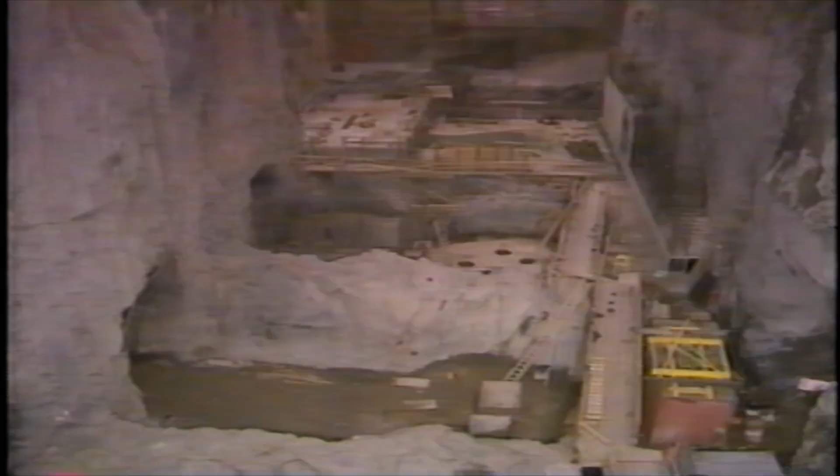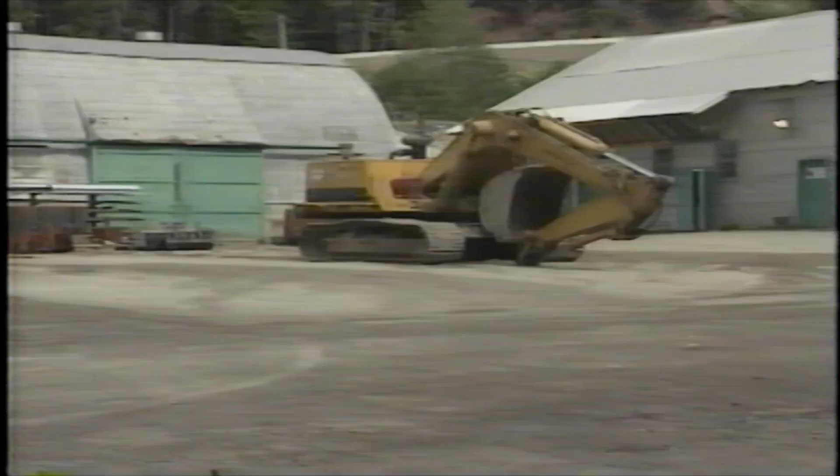On June 13th, in response to a court decision putting the future of the Kemano Completion Project in question, Alcan started to slow down operations. Eventually, that slowdown became a full-fledged suspension of almost all construction activity on this $1 billion project. While Alcan makes every effort to get this project back on track, hundreds of workers, engineers, and managers have left Kemano. Most of the heavy equipment, though, has been mothballed on site, ready for an orderly resumption of construction activities when the project resumes.

To give you a better understanding of the situation we're facing, here's Alcan's Vice President for British Columbia, Bill Rich. As this will be the last news video until work resumes on the now suspended Kemano Completion Project, I want to take this opportunity to make a few comments about the project and what lies ahead as we make every effort to get it back on track.

First, I'd like to review briefly the events of this spring. In May, a decision by Mr. Justice Walsh in the Federal Court of Canada ruled that the Kemano Completion Project must undergo a federal environmental review. In his judgment, he quashed the 1987 execution of the Kemano Settlement Agreement, which had secured for Alcan the conditions under which we could carry out construction and operation of the project. This agreement, which had been signed by both the federal and provincial governments, spelled out everything Alcan was required to do during both the construction and the operation of this final phase of our Kemano project, both from the perspective of environmental protection in general and the fisheries protection program in particular.

Both governments had initially approved our project 40 years ago, and as many of you know who worked on it, most of the major physical elements of the power generation system have been in place for decades. The 1987 agreement was really about the modern environmental improvements which Alcan agreed to make to an old design. It was not approval for a new project. And to confirm that view, the federal cabinet passed an order in council directing that the federal review process for new federal projects did not apply to Kemano Completion. Justice Walsh quashed that cabinet order in council as well, an unprecedented action by a court.

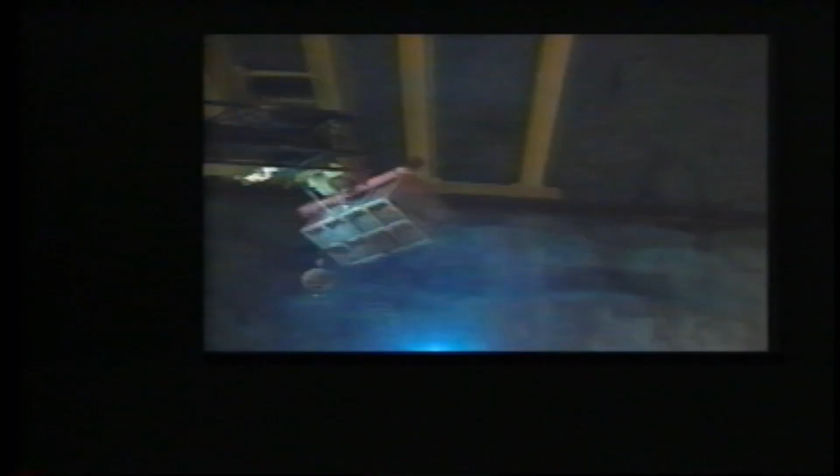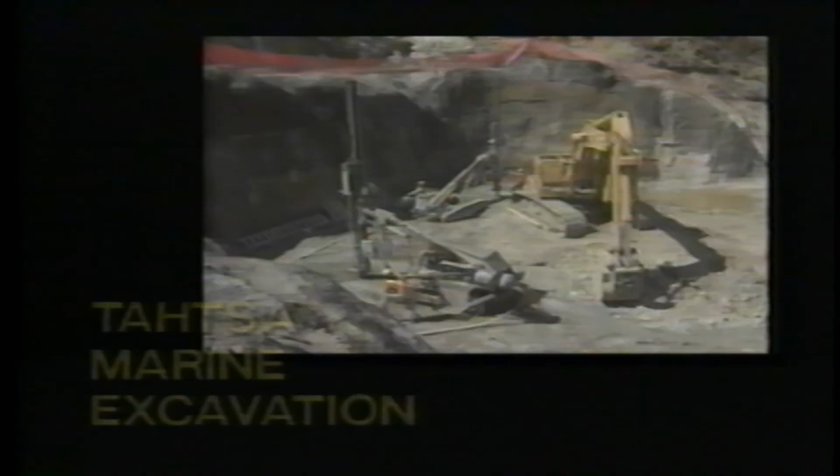In this edition of the KCP News video, before the shutdown, the Kemano Completion Project was rolling along in high gear as the underground work moved from the excavation stage to the structural stage. In the mountains, work is wrapping up on the new Tahtsa intake, and we get a first-hand look at one of the largest marine blasts in BC history.

From the very beginning, KCP has made safety the number one priority. In this news video, we'll meet the safety team. And after more than a year of boring through 8 kilometers of granite, the tunnel boring machine finally holes through. But first, our progress report.

Although it's deserted now, in early July the underground powerhouse excavation was teeming with activity.

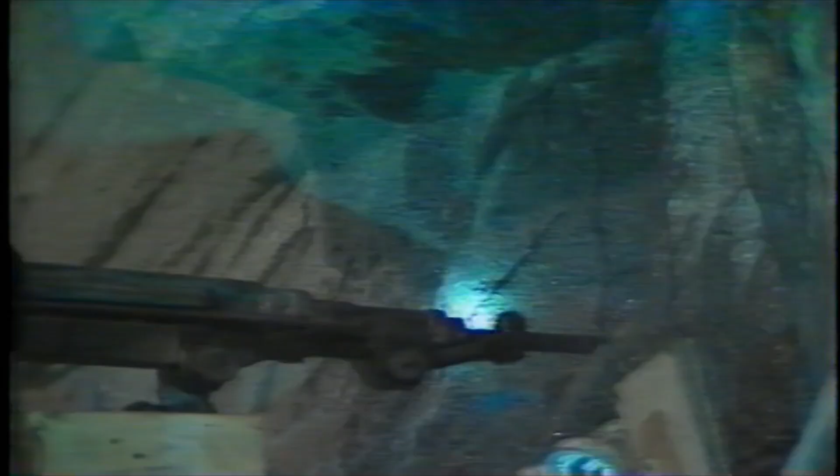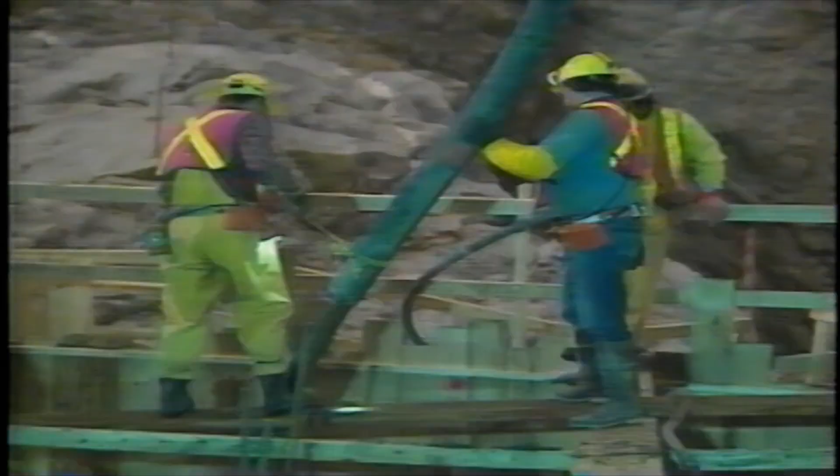All of the major drilling and blasting on the powerhouse excavation was completed by the end of May, and Mount Dubose was bustling with heavy equipment and trucks servicing the first stage of structural construction. Most of the work at the time was building forms and pouring concrete for the pump and inlet valve galleries. The transformer gallery was already fully excavated, as was the new powerhouse.

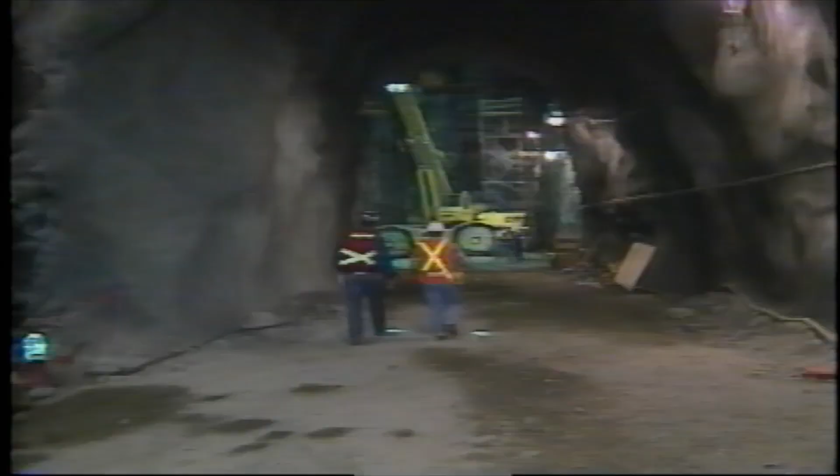Between the two caverns are a number of tunnels to accommodate conduit between the transformers and the generators. The lower tunnels, part of the tail race manifold, were among the first elements completed.

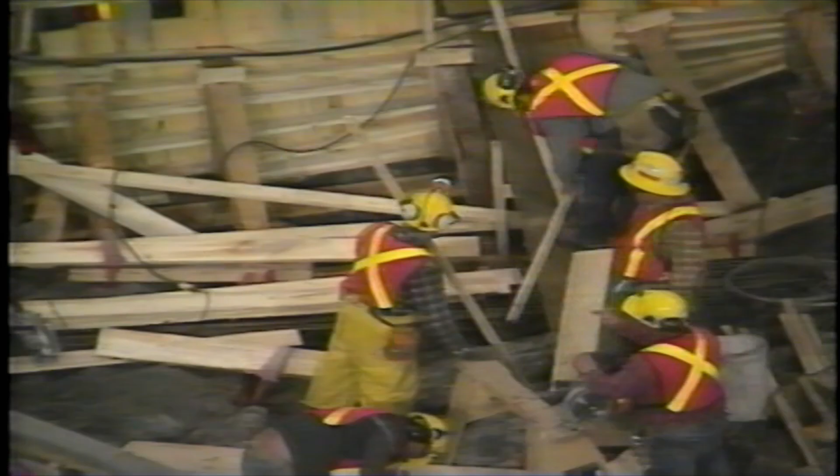Soon after PCL Northern completed rock excavation, concrete pouring began. Among the first jobs was leveling the rock floor of the excavation. With that complete, the powerhouse was ready for the addition of structural elements such as walls.

The bottom level of the powerhouse is where water will drive the new turbines. Before the shutdown, workers here were constructing the runner pits which will channel water from the penstock through the turbines and into the tail races.

100 meters or so deeper into the mountain, work was well underway on excavation of the new penstock, a shaft 4.25 meters in diameter that will carry water from the power tunnel downwards at a 46-degree angle to the turbines in the powerhouse.

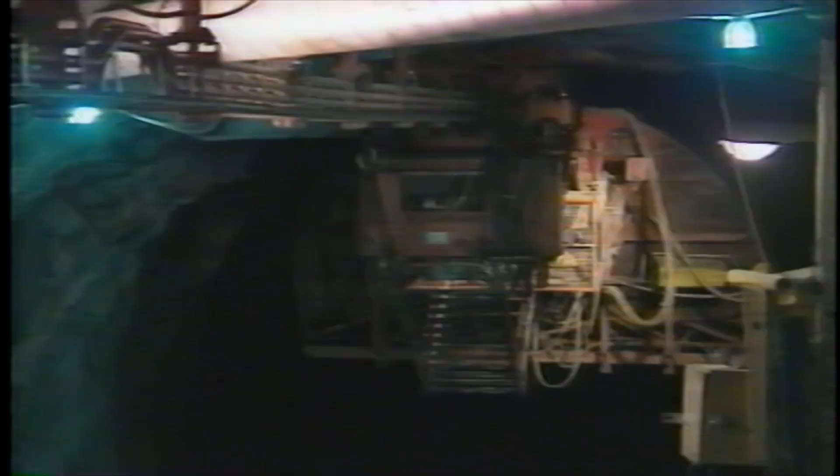The principal piece of equipment on this operation is called an Alimak raise climber. Essentially, it's an articulated trolley suspended from a track on the top side of the penstock raise. The Alimak is powered by a diesel engine that drives it at roughly 27 meters per minute.

Two of them are used in each excavation. The lead Alimak provides the actual work platform for the 3 drills and crew. Following it up the raise is the alley cab. This vehicle transports crew and supplies.

Once in position at the rock face, the crew transfers to the Alimak work platform. Supplies are winched in a basket from the alley cab to the Alimak. Directional guidance for excavation in the penstock raise is provided by a survey team using a laser system.

Once the correct angle of attack has been established, a series of 3-meter holes are drilled. Next, explosives arrive on the alley cab, are transferred to the rock face and loaded. The crew and Alimak then retreat, and the round is detonated.

While the muck is cleared from the bottom of the raise, the Alimak climbs to the face and the crews begin work again, scaling the rock face, adding rock bolts, extending track and ventilation units, and drilling the next round.

The plan for the penstock excavation involved drilling and blasting in two simultaneous operations. One, beginning at the base level of the powerhouse, had progressed 340 meters upward on the lower leg of the penstock excavation before construction stopped.

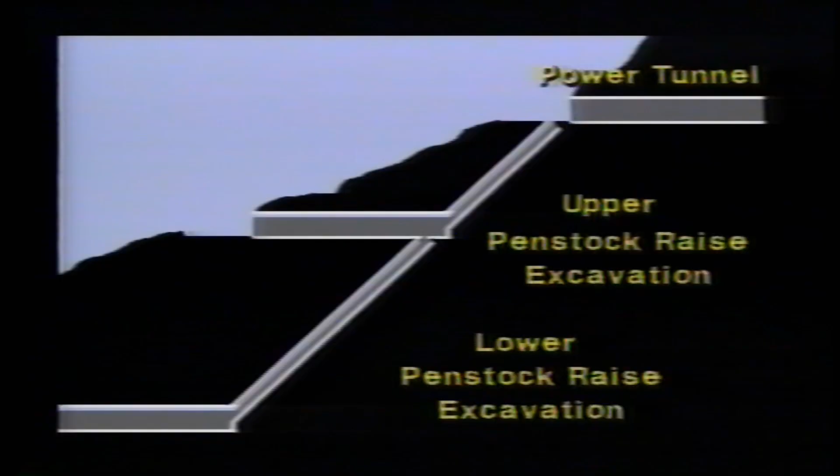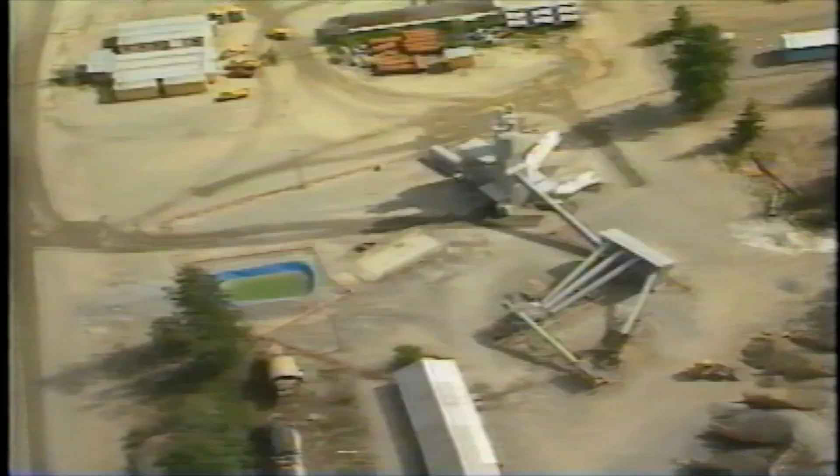Down in the valley near the maintenance center, a new concrete batch plant was constructed. With a production capacity of roughly 100 cubic meters an hour, this plant was feeding a steady stream of cement trucks bound for the new powerhouse.

In the village of Kemano, the new sewage treatment plant is in operation. With the addition of a number of new homes and a new apartment building, the old system was simply overloaded. This plant, installed by the Kemano Completion Project and managed by Rod McCabe, promises state-of-the-art operation.

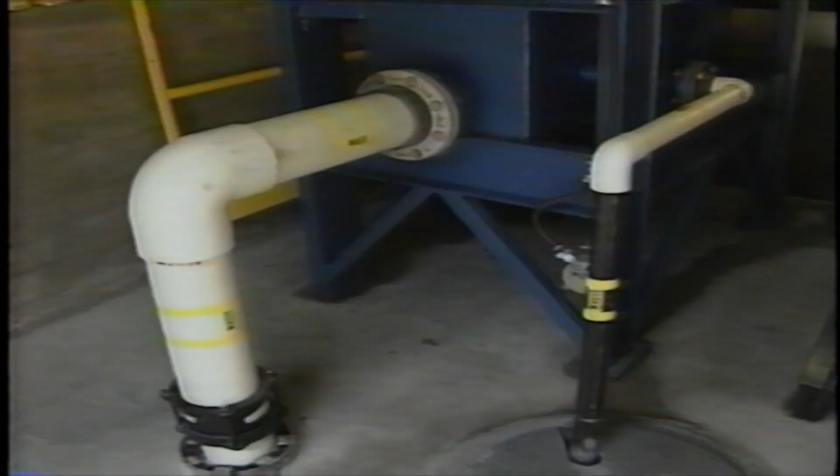It's an activated sludge plant, which is an aerobic process. All we're essentially doing is speeding up Mother Nature, by adding more of the same bacteria already at work in the natural process.

This facility has a maximum capacity of 230 cubic meters of sewage a day. At the moment, though, it's operating at only half that. According to Rod, it's also a very clean plant, 3 times cleaner than demanded by its government environmental permits.

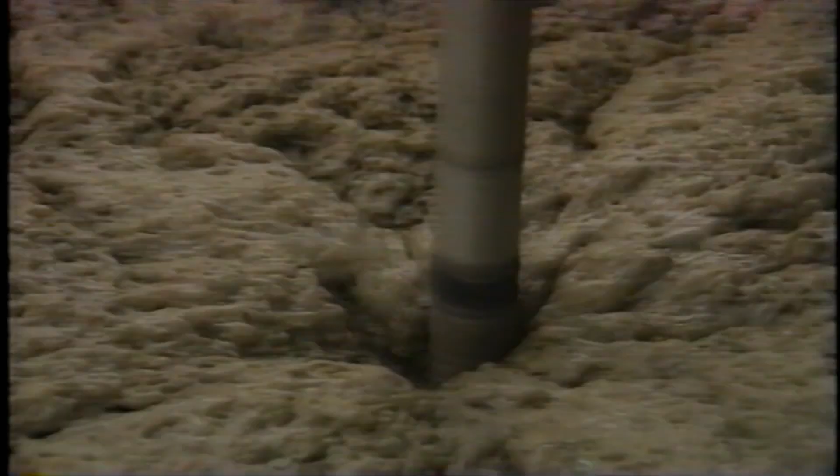The effluent, which is about 99% of the flow, goes through an ultraviolet disinfection unit and then is discharged to the river. The other 1% of the flow is digested, that's the sludge. It's stabilized and then trucked away.

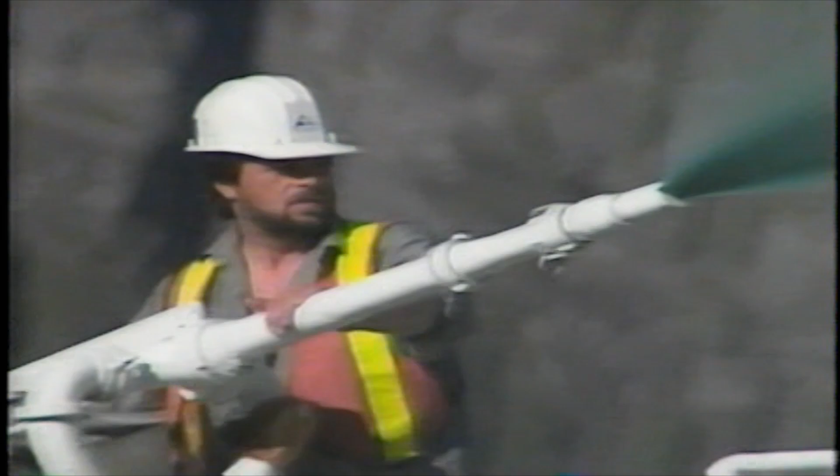With so much new construction taking place in the village over the past year, the landscape was looking rather barren. From the looks of this operation, someone's solution seems to have been painted green.

Okay. That's it. Stop.

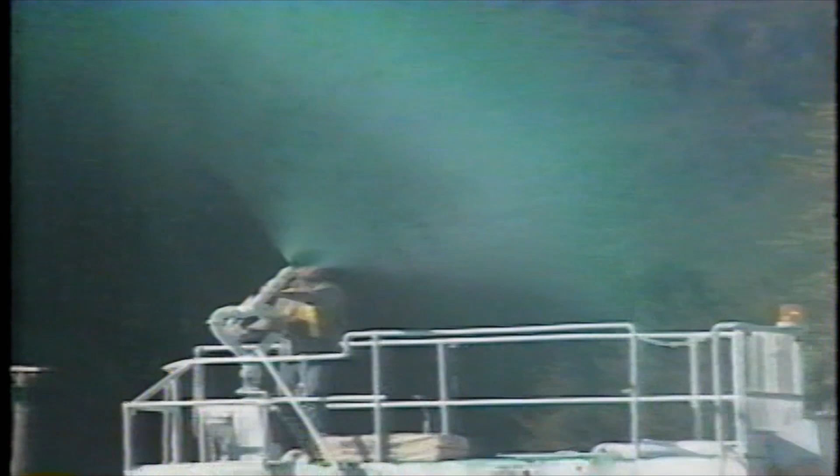Actually, what this crew is doing is spraying a layer of liquefied mulch fertilizer over the already seeded ground. This provides a rich environment for germination of the grass seedlings while protecting them from birds and wind.

On the Kitimat side of Kildala Pass, clearing operations on the transmission line right-of-way shut down along with the rest of the project. Last year, logging crews harvested around 115,000 cubic meters of timber. This year, the big job was to finish transporting that timber to Skeena's sawmills in Terrace and to clear all non-marketable timber from the right-of-way.

Although this operation was much like any logging job, there were some special considerations for the environment. We're standing here in the Kildala Valley outside Kildala Camp 2, having a look at the new transmission line that has been logged and cleared. What I have behind me here is an environmentally sensitive area called a buffer zone.

There have been 32 areas identified on the transmission line as buffer zones. We've tried to maintain a 20-meter optimum setback from any rivers, watercourses, marshes, or wetlands for these buffer zones. There are several reasons for the creation of these buffer zones.

The first one is to provide habitat enhancement for the fish populations. Secondly, it's to provide shelter and a food source for wildlife. Thirdly, aesthetically, it looks more pleasing. And fourthly, it satisfies concerns of government agencies. And the fifth one is maintaining stream bank stability.

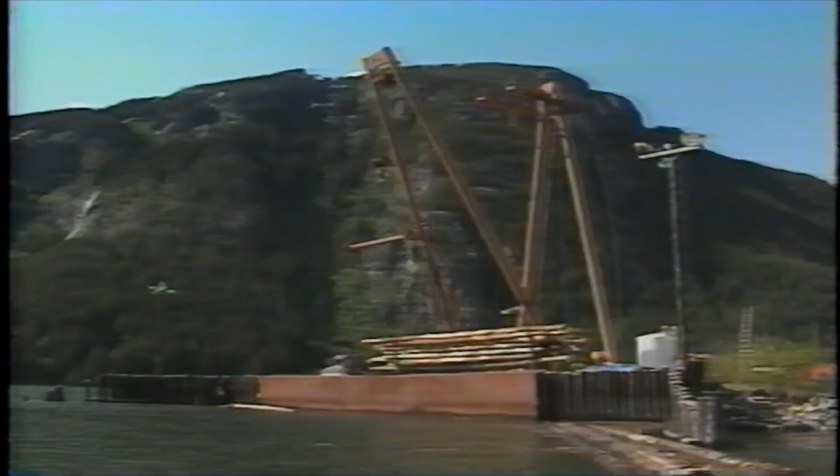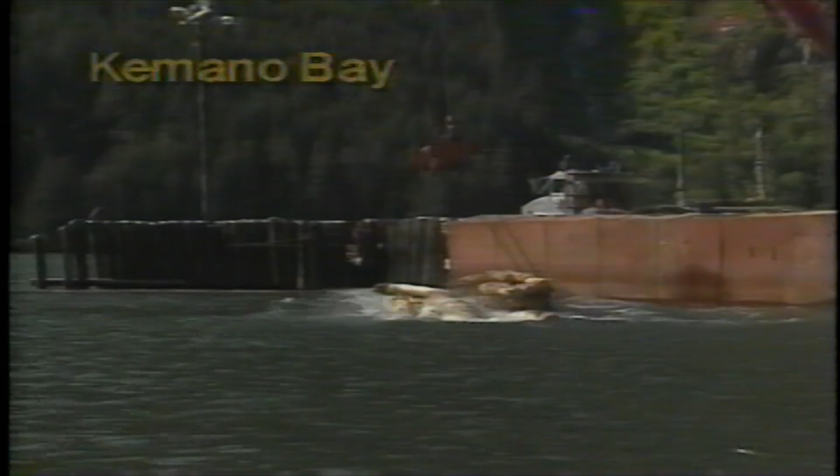During this period, logging trucks were a common sight on the road to Kemano Bay. This is where the logs began their sea journey to the mill. They were assembled into log booms here, then towed by tug roughly 80 kilometers to Minette Bay near Kitimat. Then they were loaded onto trucks once again for the trip to Skeena sawmills in Terrace.

Also in Kemano Bay, the new barge ramp was seeing a lot of traffic, with outgoing equipment from the powerhouse excavation and incoming equipment for the structural work. Bulk loading and storage of dry cement at the port was being facilitated by a new cement silo installed by the powerhouse contractor, PCL Northern.

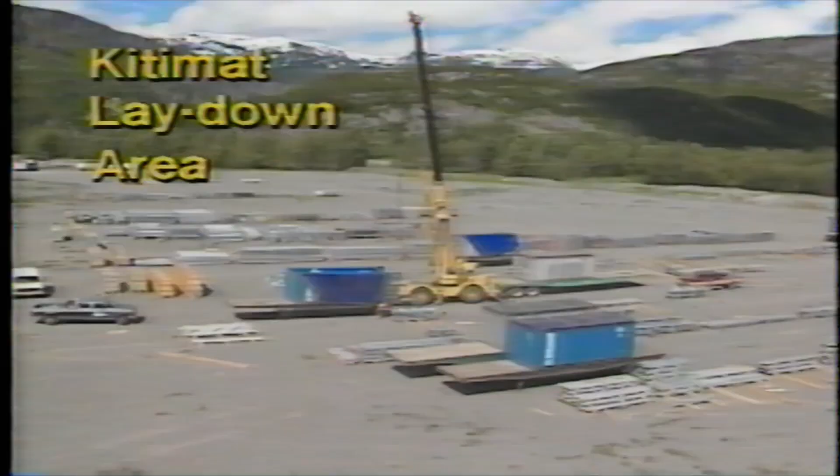In Kitimat, a new laydown area has been established. At the time of shutdown, it was crowded with structural steel for construction of transmission towers along the new right-of-way.

In the mountains, another port operation was busy this summer. By the end of May, the new West Tahtsa camp was completely mobilized and home to more than 60 people. This is the staging area for work on the new Tahtsa intake, a short distance away over the water. Like the original intake 500 meters away, this one will control the flow of water entering the power tunnel for the 16-kilometer trip to the powerhouse in Kemano.

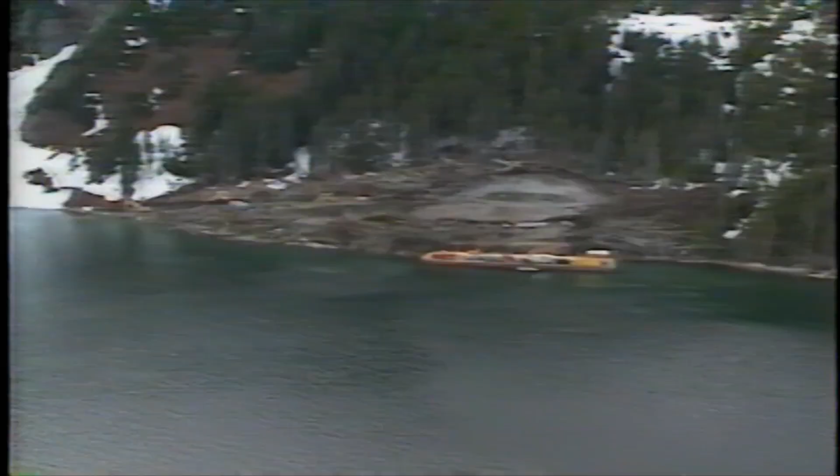Work at this elevation can only take place during the short summers. It will continue until this stage is finished, probably in October.

To service the worksite, PCL Pacific Contractors commissioned a new landing craft. Aside from a couple of small boats, this is the only way to get equipment to the site. As well, much of the drilling work is being done from a barge.

The primary job this summer was the drill and blast excavation of the adit and the underwater approach to the new tunnel intake. Work must progress quickly at this site. Sandifer Road, the only land access to the site, is expected to be closed by snow as early as October.

On July the 10th, a major milestone was passed, virtually ensuring that this deadline would be met: the underwater blast clearing the approach to the new tunnel intake. We'll have the complete story on the Tahtsa blast a little later in this video.

One of the main focuses of the Kemano Completion Project was the emphasis on safety. As the man responsible for planning and managing the safety program at Kemano, Art Cannon insists that safety awareness is a priority.

KCP emphasis on safety has been second to none. Alcan and Bechtel combined in the design, engineering, planning, and distribution of responsibilities, took every necessary precaution to assure safe working conditions for all employees working in Kemano.

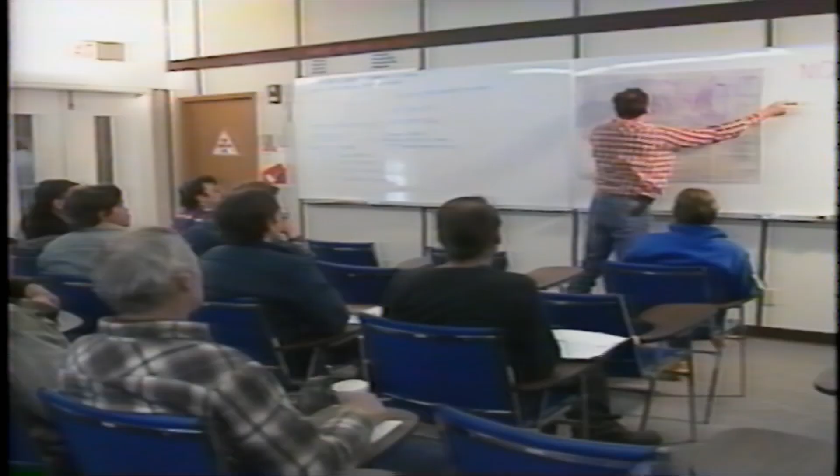This valley that we have going to one of the work sites from Kemano Village up to Heretsky Camp, that's where the adit is that's being driven in. Alcan has spent a considerable amount of money on safety in the Kemano Valley.

For example, we have a very well-equipped indoctrination center. We have emergency vehicles, and we have a well-equipped first aid clinic with all related material.

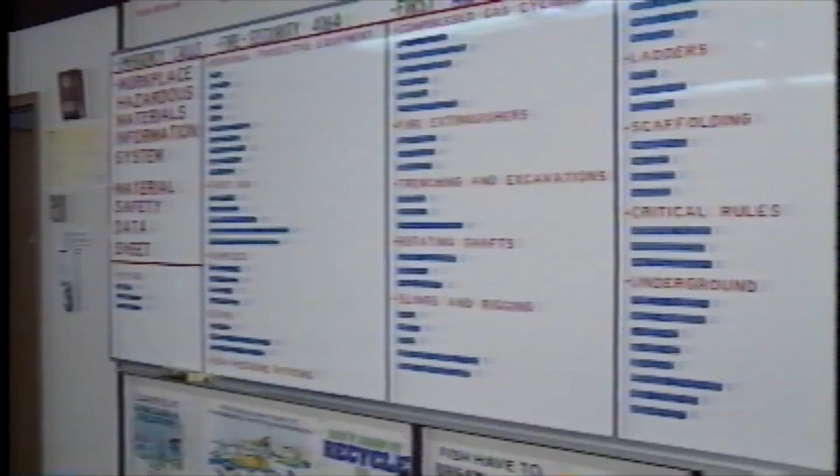We have spent over $750,000 on emergency equipment. The KCP Safety Department consists of 4 senior safety representatives, a registered nurse, and 3 first aid attendants covering the Sequokin nursing station 24 hours a day. In addition, each contractor in his specific area of work has a first aid clinic, first aid attendants 24 hours a day, and a safety department with supervisors on each shift.

We have several emergency response teams organized in the Kemano Valley. We have teams for mine rescue, teams for mountain rescue, teams for avalanche rescue, a volunteer fire brigade, and a security team that covers the camp 24 hours a day. Within these emergency response teams, we have qualified first aiders that are an integral part of each one of those teams.

Every new employee that arrives on the Kemano Completion Project must attend an indoctrination session. He is given a safe practices manual which explains his responsibilities regarding accident prevention. The session takes into consideration the hazards involved in each specific trade, and also allows us to conduct a risk analysis jointly with the worker related to hazards involved in his own trade.

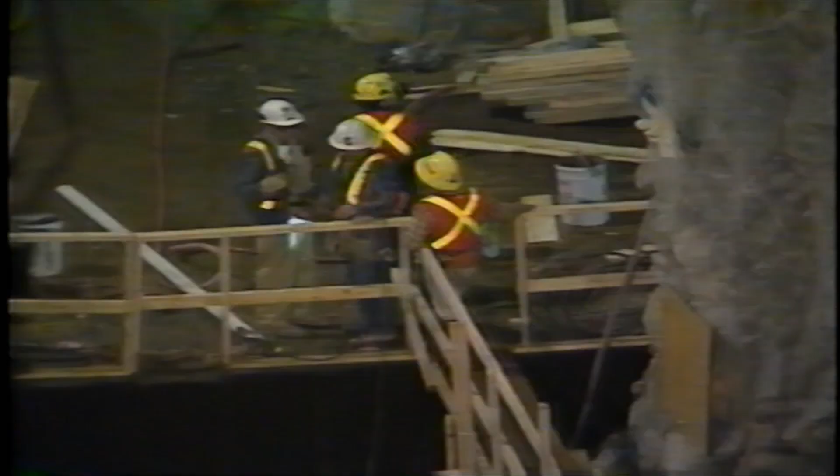We also explain to him in great detail the rules and regulations that are being enforced in the Kemano Valley, and his right to refuse to work, because he has a very specific responsibility to follow all rules and regulations. If he does not know, he should ask, and we ask him to continue a constant dialogue with his supervisor to assure safe working conditions at all times.

The manual also allows him to conduct a risk analysis of his own aspect of work before the commencement of each shift, and assists him in assuring safe working conditions for himself and his co-workers.

As I mentioned earlier, one of the key elements in our safety program is the emergency response teams. We have one team in mine rescue led by Jerry Palm, who has 21 years of experience.

The situations here in the Kemano Completion Project which would call for a mine rescue operation would be a fire underground. We've got a possibility of a cave-in anytime you work underground, and we also have a penstock here, a long penstock, where men could be trapped and we could end up responding to an emergency. Mine rescue team training on the Kemano Completion Project consists of a minimum of 4 hours training for each team.

In that training, they actually wear the apparatus, go into the underground operations, and we also like to simulate actual rescue scenarios.

There's been a fire reported in the air supply tunnel, and we have to go down. There's one man unaccounted for. I believe it's a Teamster. He dropped off a load of explosive, and he was on his way out when the fire was reported.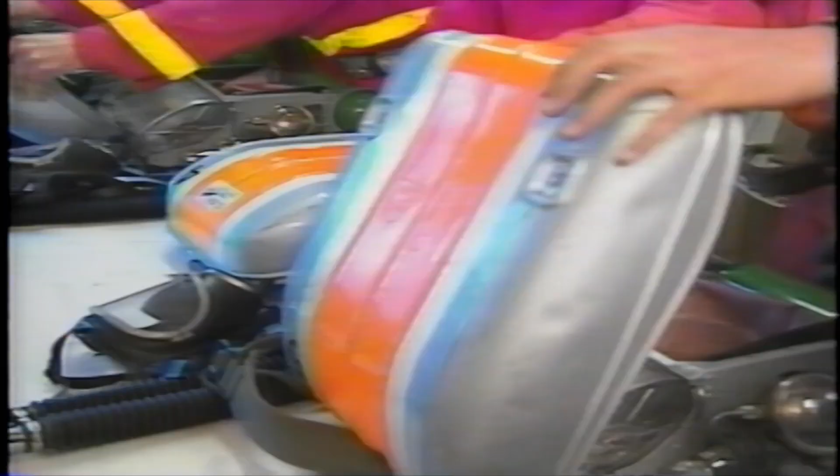The call comes into the contractor's first aid, and then he notifies the construction manager, who gets a hold of the safety department, who calls out the mine rescue team. They respond to the mine rescue room, where they're briefed by the safety department and the mine rescue team captain. From there, they check out their gear.

Number 6, okay. Number 5, okay. Number 4, okay. Number 3, okay. Number 2, okay. Ready for your negative pressure test?

A mine rescue team is made up of 6 members. The number 1 man, or team captain - some of his duties or qualifications: he's got to understand mine gases, he's got to be able to read plans, and most important, he's probably got to be a good leader of men. He's got to have a qualification to lead people.

The number 5 man, or vice captain - his qualifications are much similar to that of the captain.

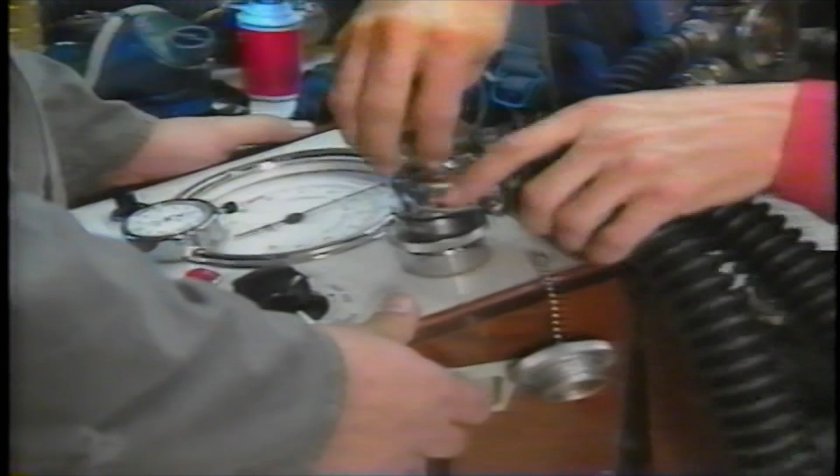And in addition to that, he's there to watch out for things that the captain might have missed, and also watch out for the rest of the team. Numbers 2, 3, and 4 are the workers of the team. You'd want an electrician, first aid man, miner, and maybe somebody with some mechanical experience.

The number 6 man is a fresh air base man. He looks after the fresh air base and equipment, and communicates with the team over the telephone. When the captain calls out, he records information and passes on any information.

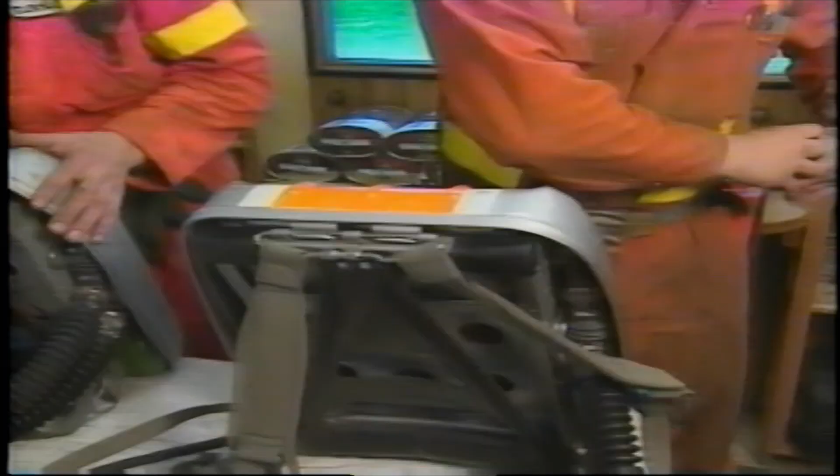Bench test complete and okay. Don, your apparatus team? Safety of the team is of the utmost importance, so they do a thorough bench drill. This takes approximately 25 minutes, and it's serious - very military-like.

They move from there to the portal. When they get to the portal, the team captain checks his team thoroughly to make sure that all their apparatus is functioning and that the team is okay before they enter.

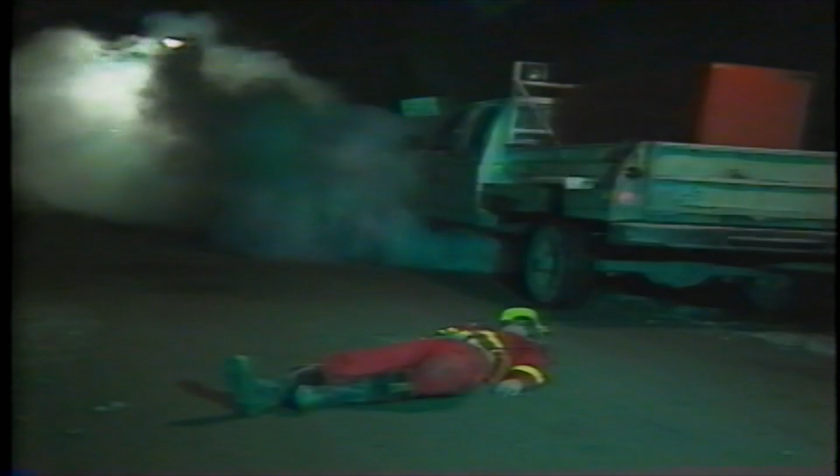The priorities upon entering the tunnel or underground operation is safety of the team, so they're watching various elements on their way in. They proceed until they find a problem, which could be a fire, as it is in this situation.

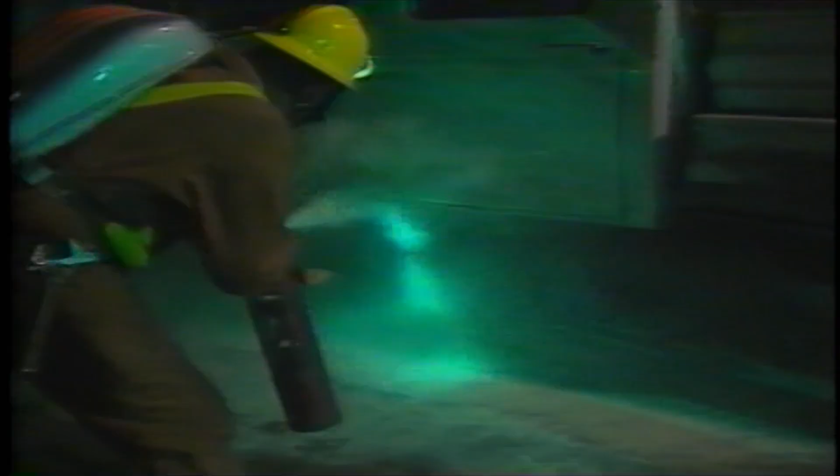They respond to the fire by putting it out and checking it, then go on further from that point and find the patient. They tend to his first aid needs, and in this case there's a lot of smoke, so they put a mask or breathing apparatus on him and bring him out to surface.

Team discipline is of the utmost importance in a rescue operation. In order to have any rescue operation succeed, you've got to be disciplined.

Once they reach surface, the contractor's ambulance has responded to the portal. He's loaded into the ambulance and taken off to our first aid clinic in Seekwyakin, where he'll be medevaced from there.

Following that, they return back to the mine rescue room where they attend to their gear and take it off, and the captain is debriefed by the mine manager, who will, if another team is needed, brief them before they enter, and it carries on like that.

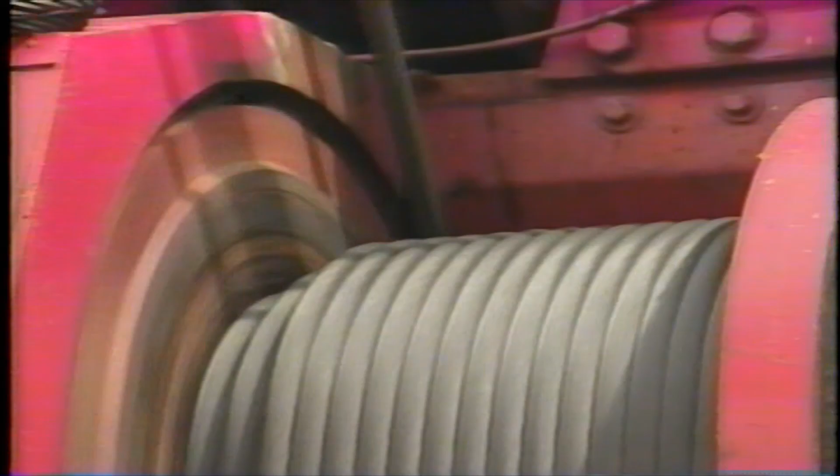When contractor PCL Pacific Constructors took on the job of building the power tunnel intake at West Tahtsa Lake, one of their first requirements was a small navy. This landing craft is being launched at the new West Tahtsa camp.

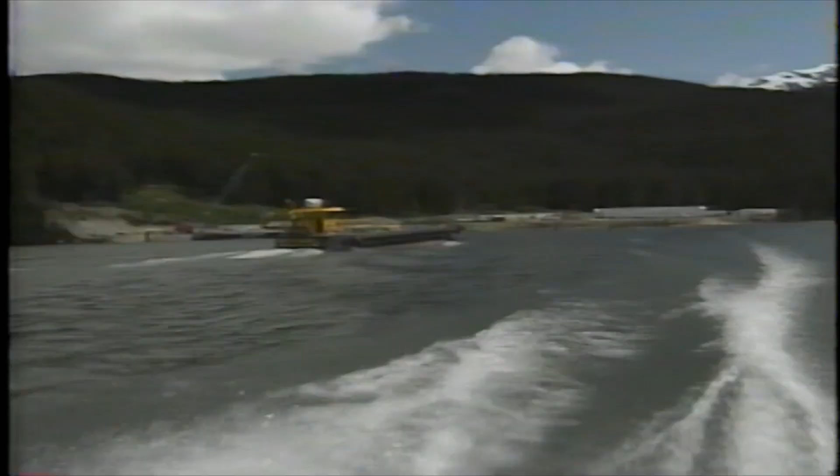The camp has been built as a staging area for equipment and building materials to be loaded onto boats and barges for the trip to the site. It is located at the end of the Sandifer Road on the shore of the lake. The work site itself is 1 kilometer away across the water, about 500 meters from the original intake.

While virtually all other work was halted on the Kemano Completion Project in June, this was the one significant exception, so that all major elements of the project can be completed within the required schedule.

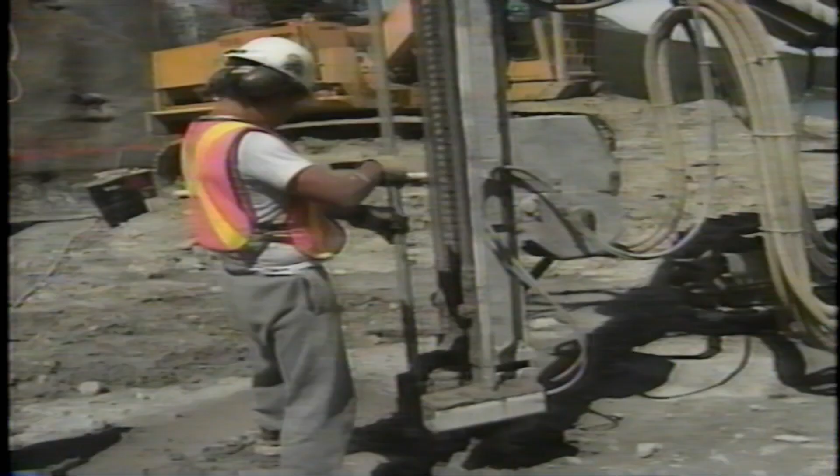On shore, drill and blast crews prepare the shoreline rock face for the intake structure. This requires excavating down to a level 24 meters lower than the surface of the lake.

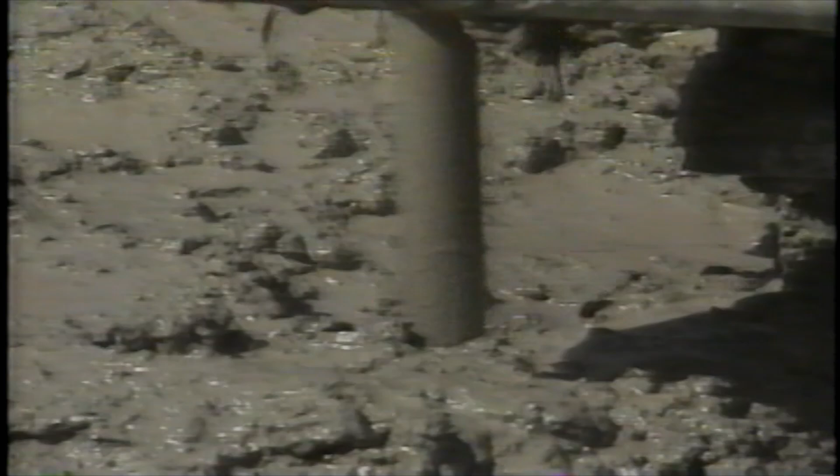At the bottom, a stub tunnel was excavated approximately 30 meters into the mountain. When the tunnel boring machine completes the power tunnel, it will hole through into this stub tunnel.

A few meters offshore, a major marine drill and blast program has been completed. The job here was to excavate a clear approach to the new intake, 12 meters wide on the bottom and 25 meters below the surface. Drilling and blasting took 34 days. Mucking will require about 3 months.

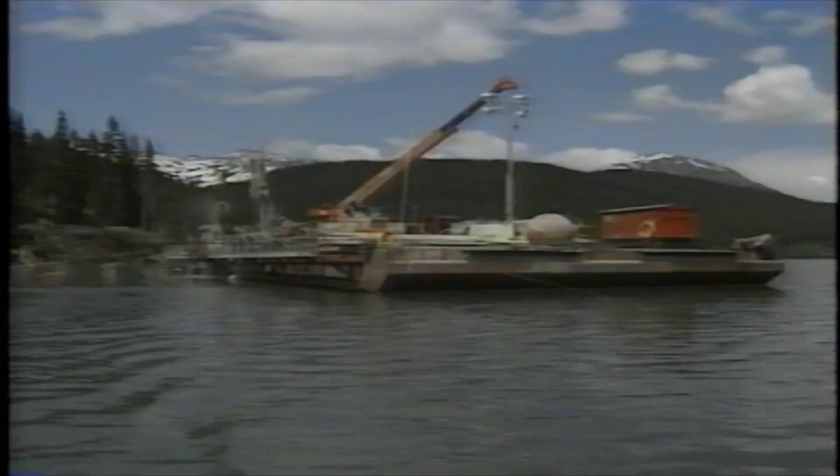Because it's difficult to establish and maintain a position while drilling on water, this barge was anchored using some sophisticated surveying techniques. David Philipchuk, project manager with PCL Pacific Constructors, told us that the marine drilling was considerably more complicated than the onshore operation.

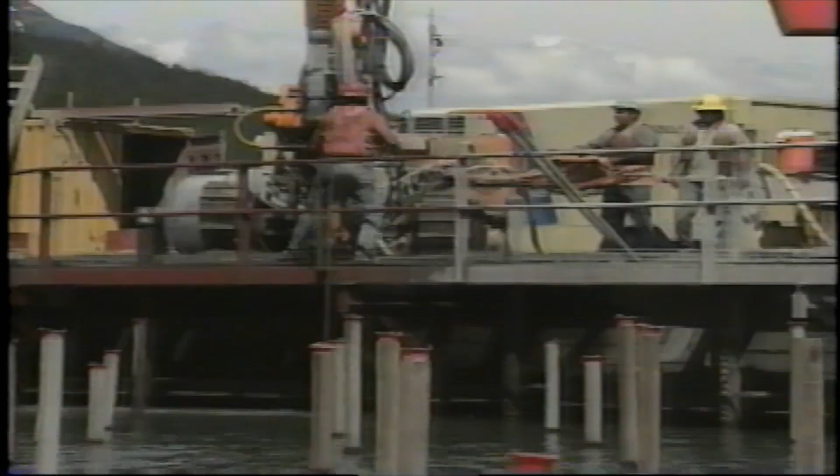One significant difference is we have very long drill holes in these locations because of the depth of the rock, from the water surface down to the base, the subgrade elevation we're drilling to. We're drilling in the order of 25 meters in depth. So the control over the straightness of the drill holes and the location of the bottom of the drill hole is very important. We undertook a measuring program with an instrument to determine where the bottom of the drill holes were, to ensure we would get a proper break during the blast.

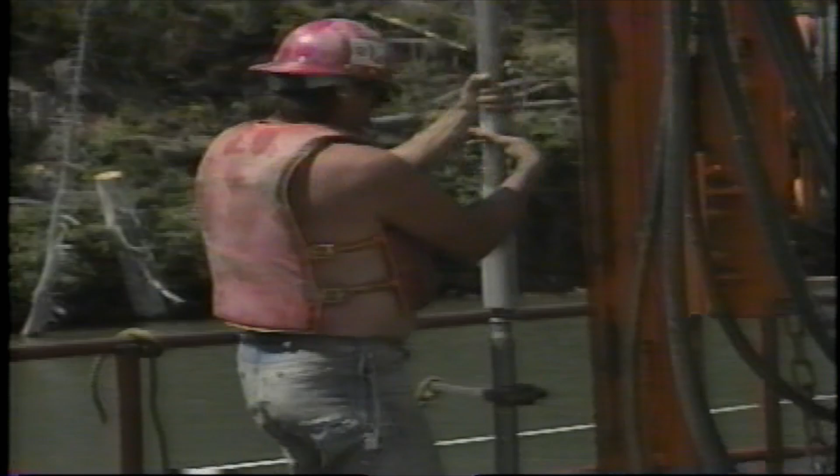Working off of our sectional barge with 2 overburden drills, we drilled in the order of 3,500 lineal meters, or about 2.2 miles of drilling in the rock.

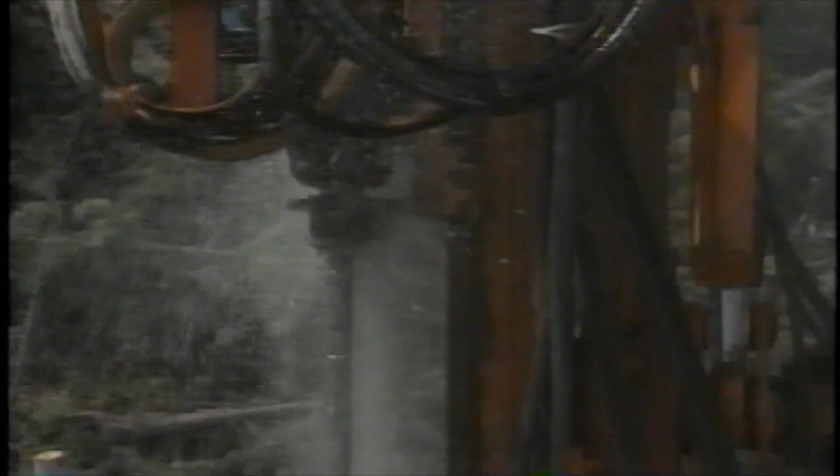Loading casings were put into every hole for subsequent loading of the explosives. All of the loading was done within the last 4-day period. The holes were left empty up until that point in time.

Compared to a dry land blast, a marine blast requires much more explosive. Not only does the blast have to contend with the sheer weight of the rock, it must compensate for the weight of the water above it as well. And in a normal dry land blast, there would be no attempt to break so much rock all in one blast. We used a product called Hydromex, which is an underwater explosive slurry in cartridges.

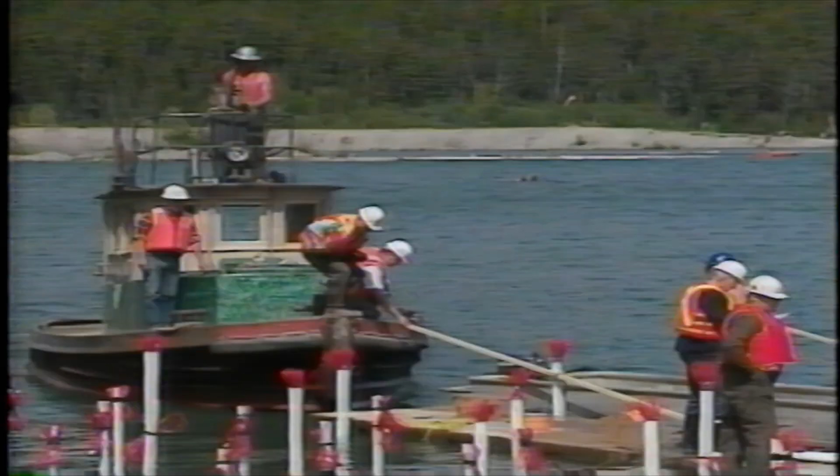The rationale for completing it in one blast is the fact that you have difficulty seeing what you're doing underwater, in terms of doing one blast and then going back and picking up where you left off. Essentially, doing one blast which goes off on a series of delays gives you the ability to cover the whole area and complete it in one shot.

Once the underwater slope was blasted, mucking operations began. This required a clamshell crane mounted on a barge to pick the muck off the bottom and dump it into a mucking scow. This created a clear underwater approach channel to the shoreline and a deep pocket excavation at the rock face. A rock plug, 17 meters long and 24 meters high, has been left between the 2 excavations.

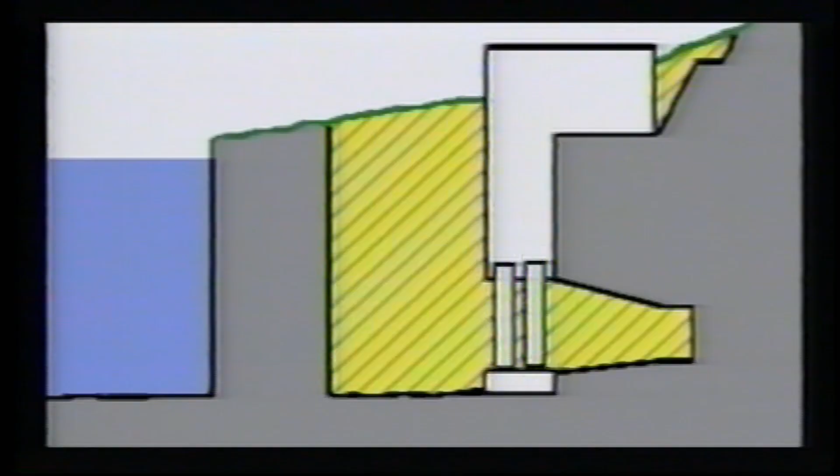This plug will be maintained until the intake structure is built and the intake gates are functioning. It will then be blasted and mucked away. Before this, though, the pocket excavation will be flooded and the gates raised.

This will protect the intake during the blast, as will a curtain of air bubbles introduced to help absorb the shock. Following the blast and the mucking operation, the gates will be closed and water pumped from the tunnel. Workers will then prepare for the hole-through of the tunnel boring machine into the stub tunnel.

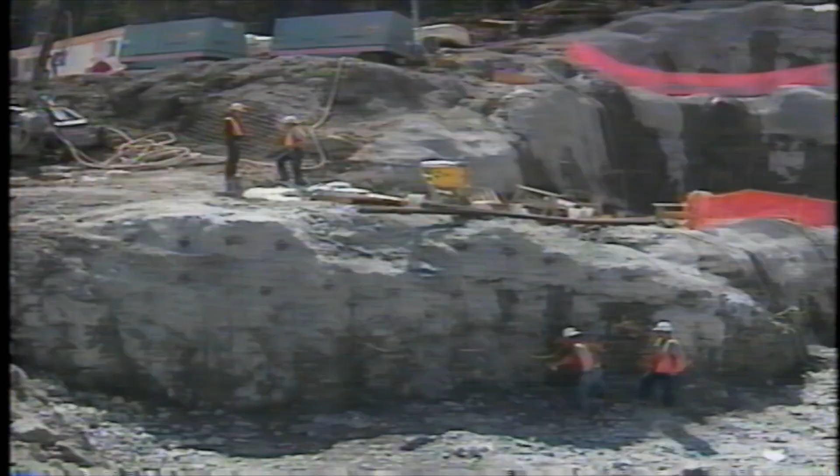As the crews prepared for the underwater blast, they set up seismic sensors onshore and offshore to monitor its effects. When the time comes to blast the rock plug, that blast will be designed using geological information gathered from this one.

At the existing intake, a filter fabric screen was installed. There was some concern that a plume of silt might develop from the marine blast, and that this might get into the working intake, causing problems downstream. As it happened, the resulting plume was very small and the filter screen wasn't needed.

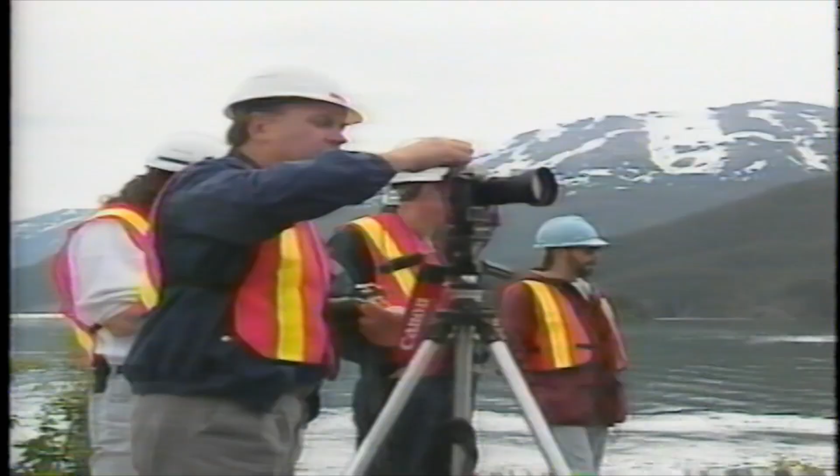At blast time, anticipations were high. This was to be the second largest marine blast in British Columbia history, second only to the famous Ripple Rock blast in Seymour Narrows more than 3 decades earlier.

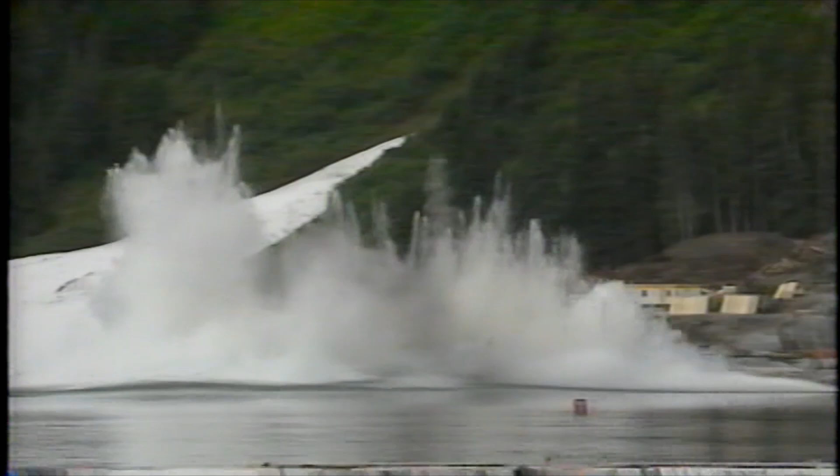In terms of Hollywood pyrotechnics, this was not a spectacular blast. From the perspective of the blast designers, though, it was a success. In their minds, the less spectacular, the better.

Everything essentially went as planned. What we saw was as expected. We had approximately 1.5 seconds of detonation for the surface cord, which was the burning of the cord that you saw, followed by approximately a 6-second period from the time the first hole detonated to the time the last detonated. So essentially, several months' work has come together in approximately 8 seconds.

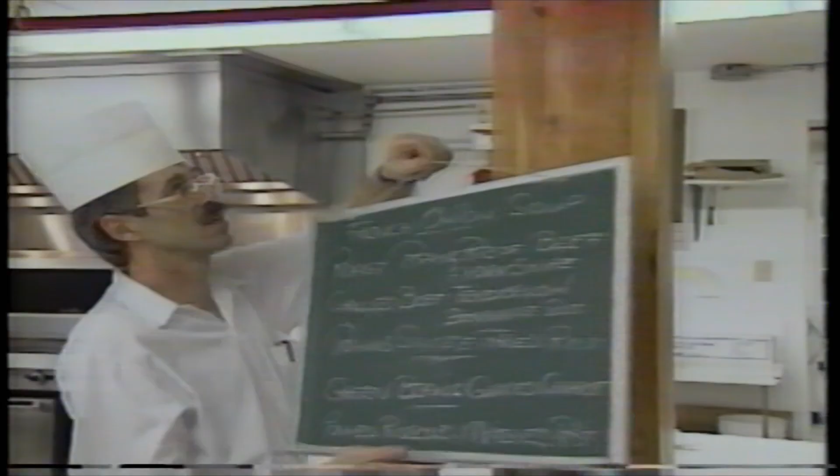The mole men and all those who support the operation of the tunnel boring machine have already celebrated the event that we're waiting for. It's a tradition in this business to have a big party, and in this case there was no exception. It was complete with speeches and souvenir jackets.

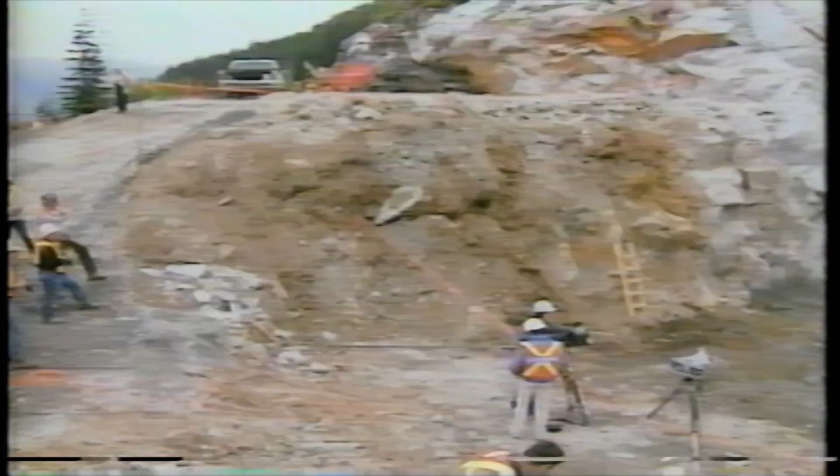While we're waiting for the hole through, let's take a look at an interview we did with Tom Morrison in his office at Horetzky Camp. Tom is the KCP contract supervisor on the TBM job, and he tells us something about the types of rock that the TBM has encountered on its trip through the mountain.

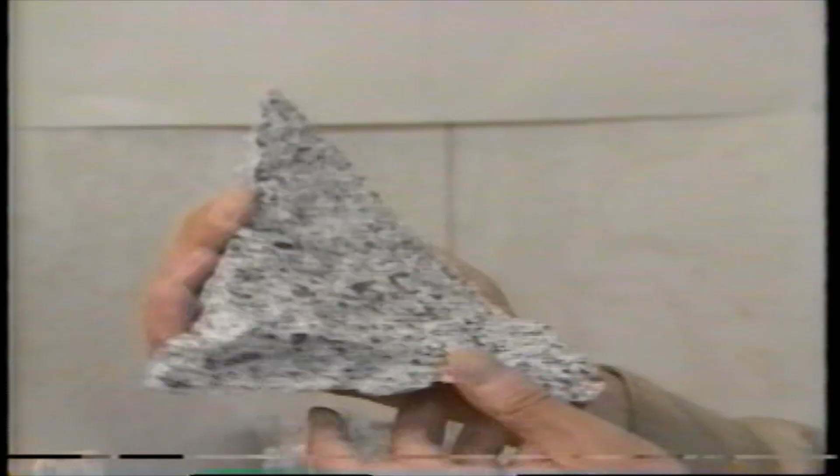So, Tom, this is a sample of the rock that's coming out of the tunnel right now? Yes, it is. This is the DuBose stock, which we're in now. We started off in the Heretsky dike, which is relatively soft material, and it then progressed into the granodiorite of the DuBose stock, which became progressively harder into the center of the stock. As we've come closer to surface, the rock has softened up and become more jointed and altered, so the progress has actually accelerated again, in spite of the fact that we're now 5 miles from portal.

And that's a very remarkable achievement on the part of the contractor. Right, right. And despite some of the difficulties you've had with some of that soft rock and hard rock, we're still ahead of schedule. Oh yeah, yeah. The difficulties actually with rock have been relatively slight.

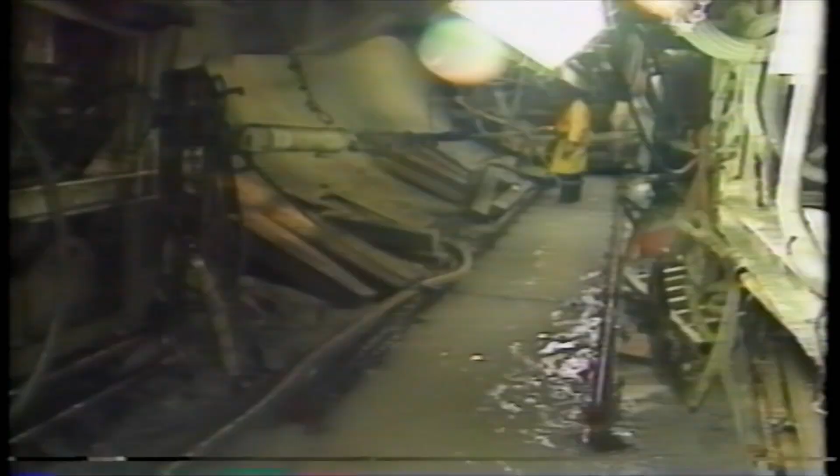There was a section back here when the contractor had only just got going, so his operation wasn't really geared up, and he went into this bad rock that had to be supported with steel arches. That set him back right at the beginning of the job, but he's certainly made up for it ever since.

Right, and certainly the last few days have really moved right along, haven't they? For the past several weeks, he's been making 35 meters a day, which in terms of a drill and blast tunnel is spectacular. It's pretty good for a bored tunnel.

I know it's hard to be precise, but people are talking about the contractor making record-breaking progress on one particular day. Yes, there was. The rock was quite soft, and the face was quite close to the portal yet. There was one day when the contractor drove 80 meters, which is extremely good. It may be a world record, or it may not, but it's certainly getting on there.

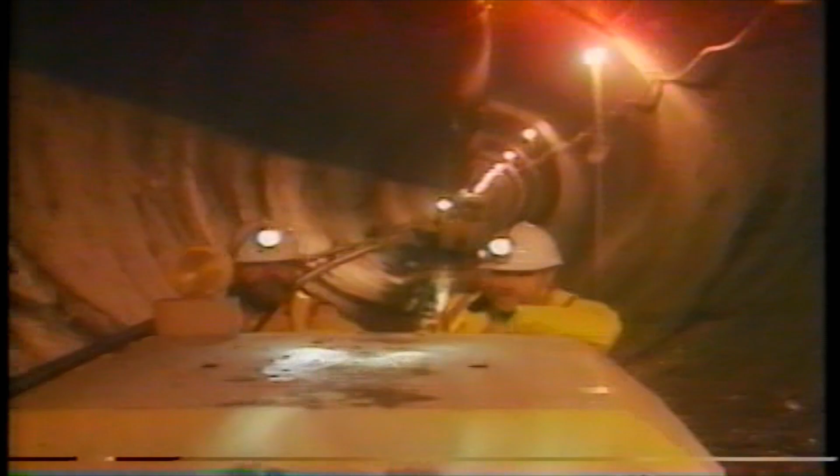Average over the whole drive was, what, in the area of 25 or 30 meters? In that order, yes, 25, 28 meters a day. I think the thing that impresses me is the contractor's efficiency, because you have to have a pretty good machine to start off with. But beyond that, it's largely a matter of organization. These guys are very highly organized indeed.

Right, so that speaks highly for the maintenance crews, all the backup and... Everything, everybody on the job. Good, great. Also, I'd like to record that the safety record has been extraordinarily good.

And this is achieved by a series of settling ponds? Yes, it is. Settling ponds, and also sprinkling the final effluent onto the muck pile, so that it discharges to land rather than to water.

You can hear the tunnel boring machine rumbling on its final push through Mount Dubose right now, and I can feel it in my feet. No one is more familiar with this machine and its operation than Gary Davey of Power Mountain Constructors. Gary shares a few insights and figures with us now.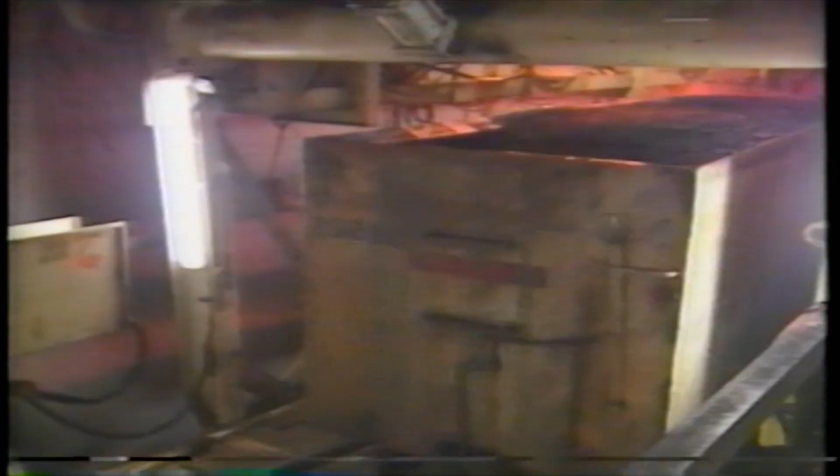Just behind you, Gary, we can see a lot of solid evidence of the work that Power Mountain's crews have done on the tunnel. Can you tell us something about the quantity of material? Sure thing, Les. Represents quite an accomplishment, as you say. There's about 216,000 cubic meters of material we've removed from the tunnel. And it has a tendency to swell a little bit, and then subsequently when you put it in a pile, due to the compaction effort, it shrinks.

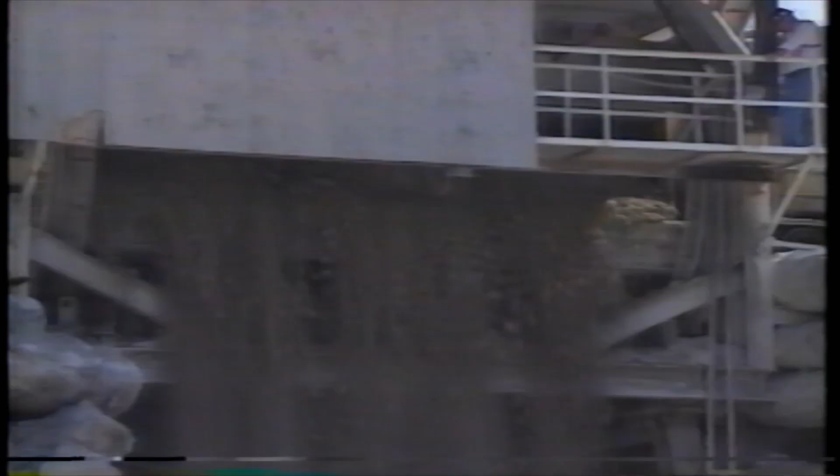That 216,000 cubic meters represents about 27,500 muck cars being brought out by those trains. It seems like only yesterday that the tunnel boring machine went in there and started this job. Well, actually, it's a long yesterday. It was about June 18th last year that we started the excavation. So about a year ago, we commenced, and we're virtually near the end of this drive now.

And you're ahead of schedule. We're definitely ahead of the owner's schedule, a little bit behind my overly optimistic schedule. Like any contractor, you tend to be a little optimistic. But still very happy with the results? That's right. In November of 1989, we predicted that we'd be done with this drive on the 18th of June. So if we hole through tomorrow as anticipated, we'll be about 6 work days behind schedule, and I don't think that's too bad of an accomplishment.

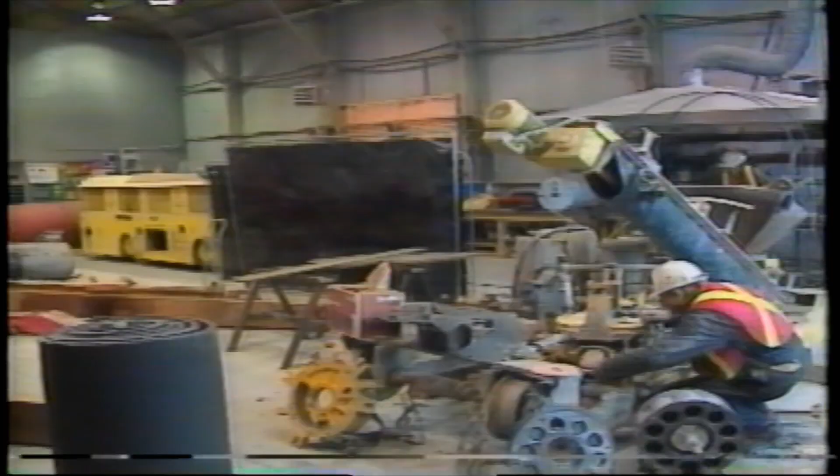When we talk about giving credit on this job, there's a tendency for us to concentrate on the guys who run the machine underground, but you've got a whole team going here, haven't you? Oh, most certainly, and they need to be recognized. They're part of this overall team. We carry about 33 people on day shift within what we'd call the support group. And that's primarily your shops, your mechanics, your teamsters, first aid people, a bull gang that prepares the material to go underground, the vent pipe, rail, all the support that they need to accomplish their work. So it is quite a bit. As you see in the background, you have to keep handling them up, placing it in the prescribed areas. So this is all ongoing work.

Truly teamwork. Yeah, and we don't want to leave out of the team the importance of the owner, his representatives, the project performance people, KCP, even down to Cal Van caterers who take care of our men during the mess hall accommodations. You gotta feed them right to keep them happy. That's right, and you bet the food is good, too. It is excellent up here.

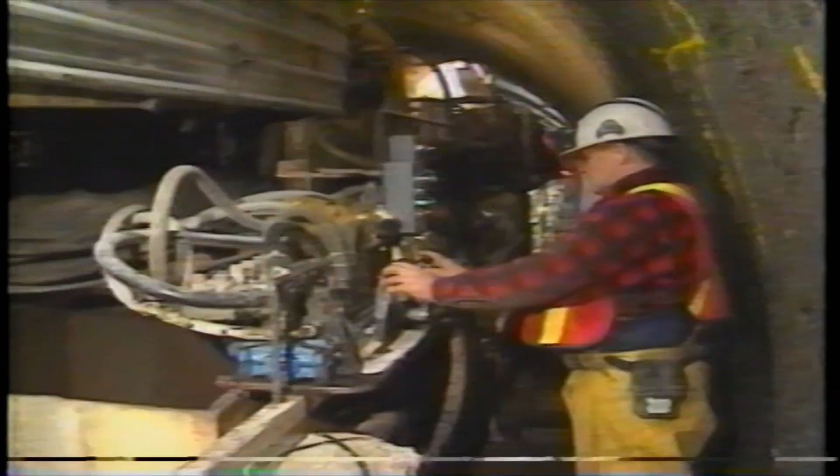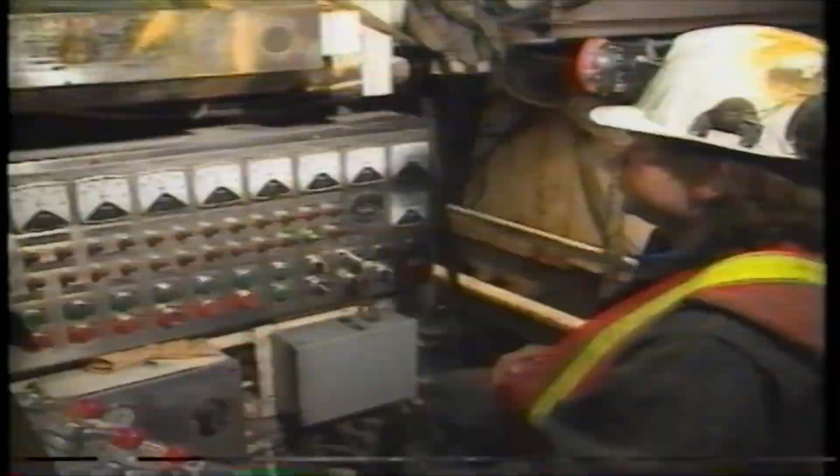Could you give us a little comparison of working with a tunnel boring machine and the more conventional drill and blast method? Yes, given the right machine for the geology, it is far faster. You have a large investment, and so therefore the configuration of the tunnel and the length has to be long enough to write off this investment. The productivity, where we estimate that we will get 92 feet or 28 meters per day, in a normal drill and shoot operation of this size tunnel, they'll get about 3 15-foot rounds, or 45 feet a day. So we're almost twice as fast as a standard drill and shoot operation. That's a big difference, isn't it? It allows us to get out, it saves you on overhead, but again, I said it's a big capital investment to set up this kind of operation.

We're going to hole through tomorrow, as you mentioned earlier. Yes. What happens to the tunnel boring machine then? Well, immediately after we get through all the rejoicing, we can start tearing it apart. We'll bring the machine out into the open air beyond the portal, and that allows us to lift the top shield fingers. We'll take that off. Then we drop the side supports, and this frees the machine then to take off the outer segments. This reduces the size of the machine to the extent that it can be pulled back out of the tunnel.

While we're doing the mechanical work on the head of the machine out there at the west end portal, we'll be removing all the ventilation fan from in the tunnel, the vent pipes, that's a 42-inch diameter section of pipe, along with the transformers, which clears the tunnel for it to be brought back.

Well, we look forward to that. Congratulations on a great job, Gary. Everybody deserves a lot of credit on this. Well, thank you, and I'll accept that for Power Mountain and all of our crews, Allied Hydro Council. I think they've done us an excellent job. We want to share it around. Right, that's right.

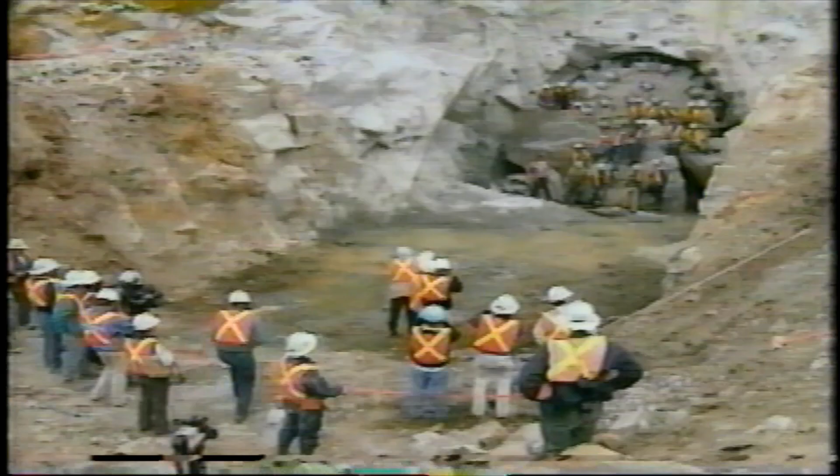Well, that wraps up events from here today. Now the crews can get ready to go home. The tunnel boring machine will come out of the tunnel and be ready for its next assignment. Thanks to all of those who made this production possible. We hope you enjoyed this special feature. Thank you for being with us.